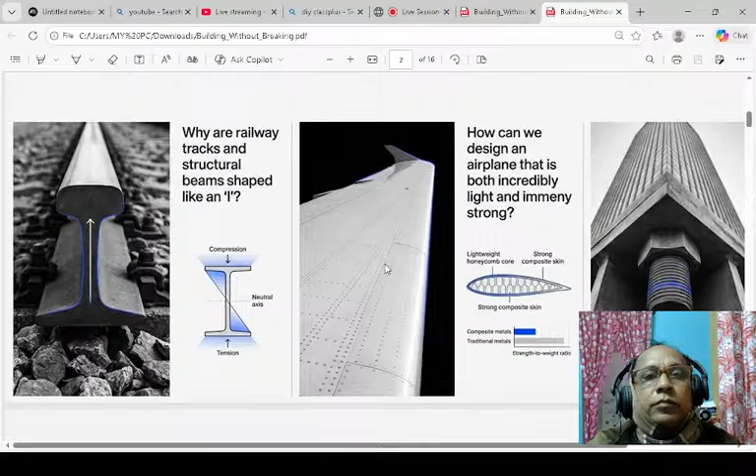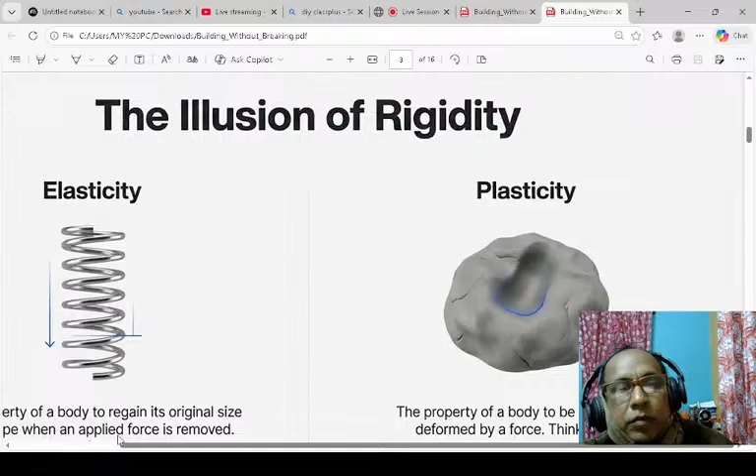The illusion of rigidity. In history, the illusion of rigidity - this is what we call it, elasticity, and this is plasticity.

The property of a body to regain its original size and shape when an applied force is removed - that property is known as elasticity. And what is plasticity? The property of a body to be permanently deformed by a force. For example, think of putty.

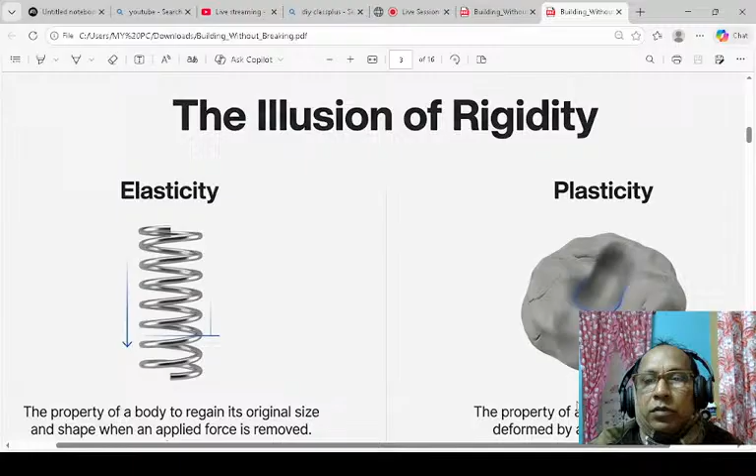The behavior is key to engineering design. The internal battle - understanding stress. When an external force deforms a body, an internal restoring force develops. The stress is this restoring force per unit area.

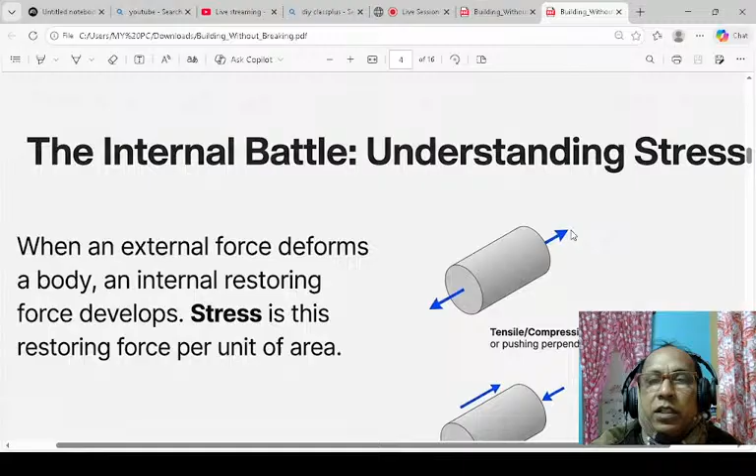Tensile and compressive stress: forces pulling or pushing perpendicular to the surface. You see here, these forces are perpendicular to the surface. Stress, that is sigma, can be written as force by area. The SI unit is the Pascal.

This is tensile and compressive stress - forces pulling or pushing perpendicular to the surface. In this case, shearing stress is forces acting parallel to the surface. And hydraulic stress is uniform pressure on all sides, like a sphere in a fluid.

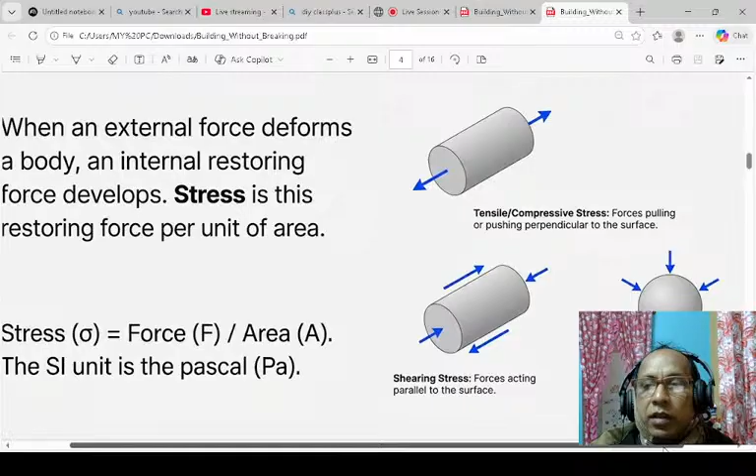The physical response - measuring strain. Strain is the measure of deformation, the fractional change in a body's dimension. It has no units.

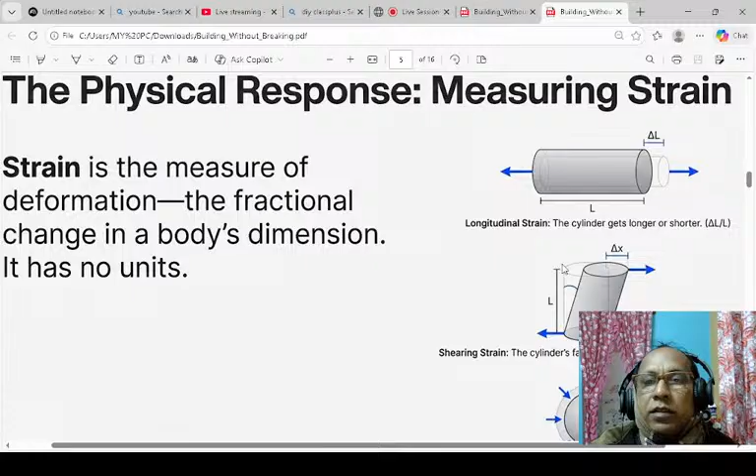Longitudinal strain - the cylinder gets longer or shorter, del L by L. Del L means change in length and L means original length. Strain is a measure of deformation, the fractional change in a body's dimension, and it has no units.

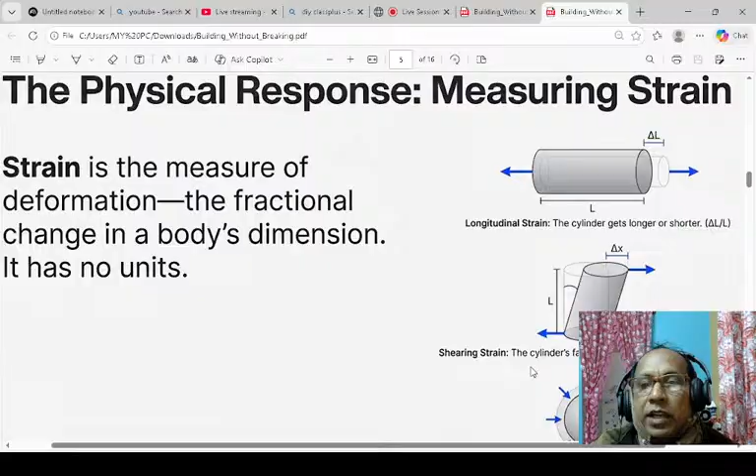Shearing strain - the cylinder faces displace relative to each other, that is del x by L. And volume strain is the sphere's volume decreases - change in V by original V, or del V by V. That is the volume strain.

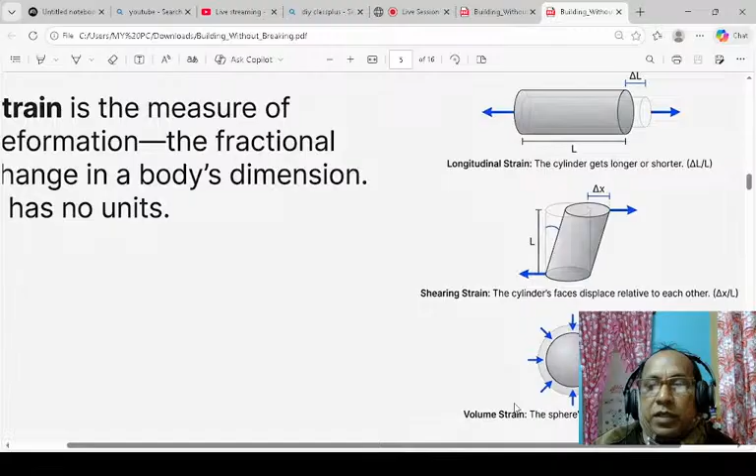So we have longitudinal strain, shearing strain, and volume strain. In longitudinal strain, we get del L by L, change in length by original length. In shearing strain, the cylinder's faces displace relative to each other, del x by L. And in volume strain, the sphere's volume decreases, del V by V.

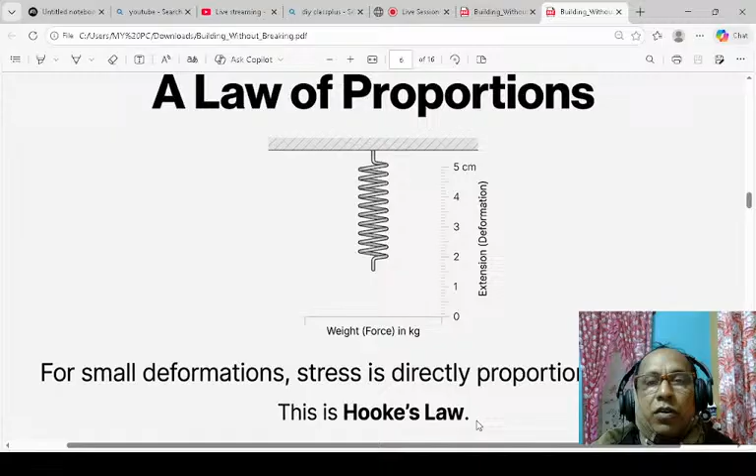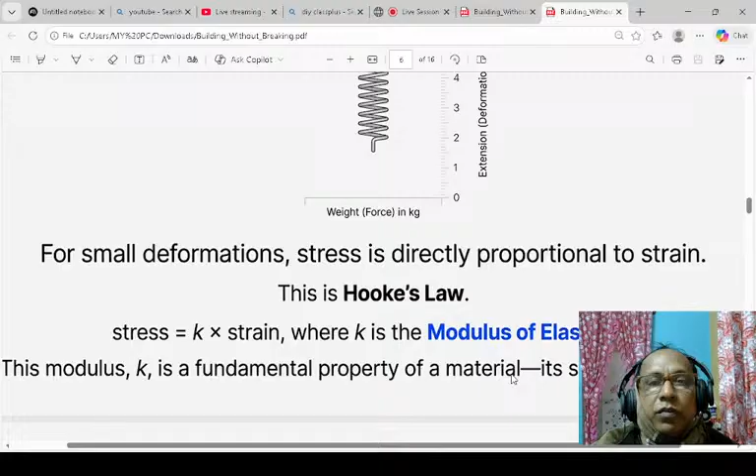The next one is the law of proportions. For small deformations, stress is directly proportional to strain - this is Hooke's law. You see the weight, 1, 2, 3, 4, 5 centimeter extension or deformation, weight force in kg - this is known as Hooke's law. For small deformation, stress is directly proportional to strain, that is, stress equals K into strain, where K is the modulus of elasticity.

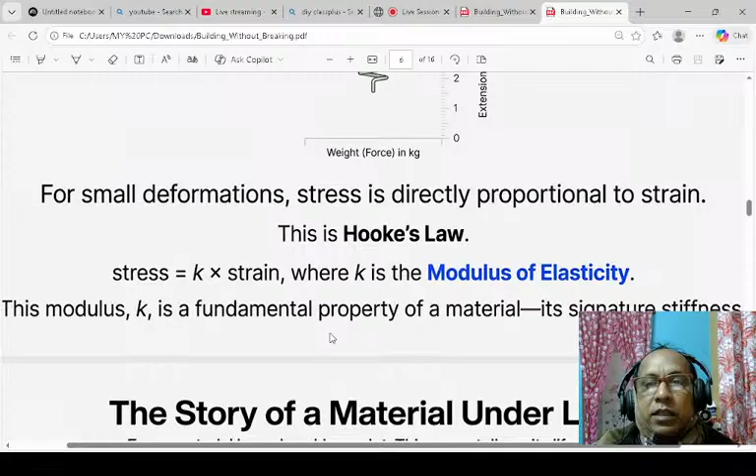This modulus K is a fundamental property of a material, its signature stiffness. The story of a material under load - every material has a breaking point, and this curve tells us its life story.

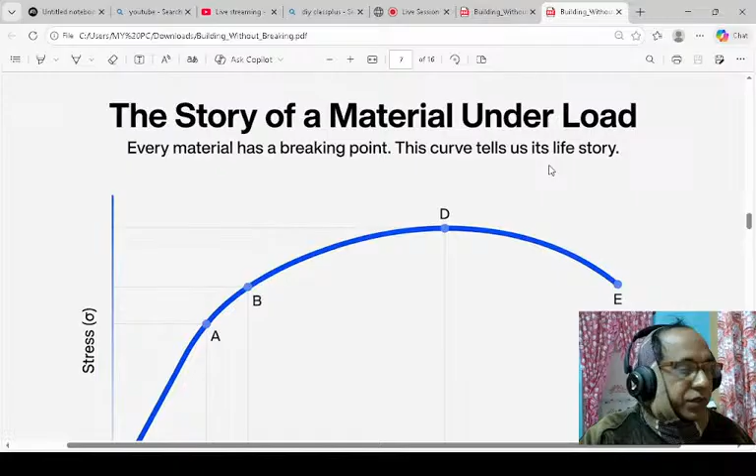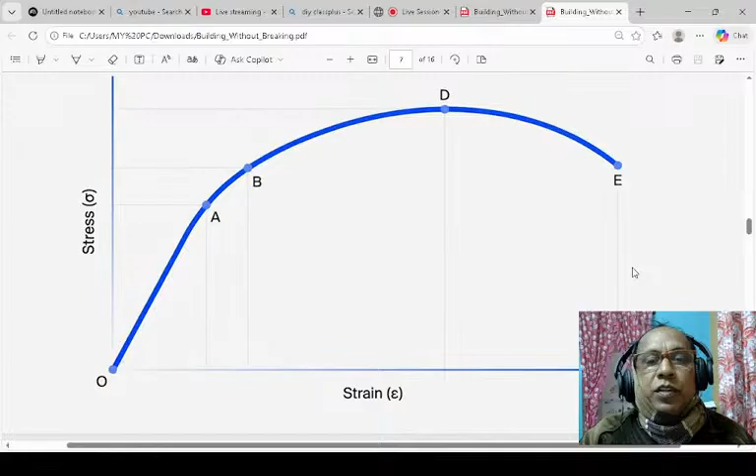This is stress, this is strain, and this is the curve A, B, C, A, B, D, and E. This is the curve with stress and strain. You see, and there is a breaking point also. You can find this in chapter 1.

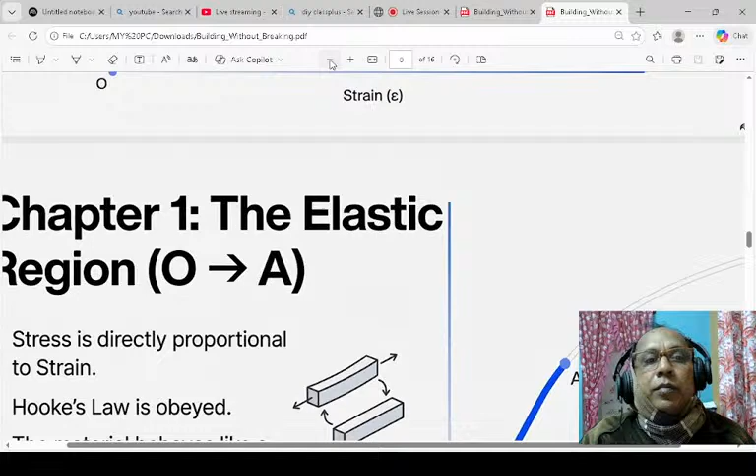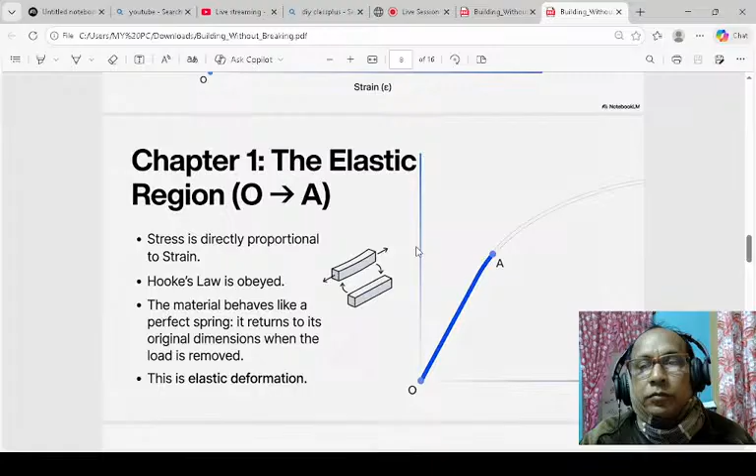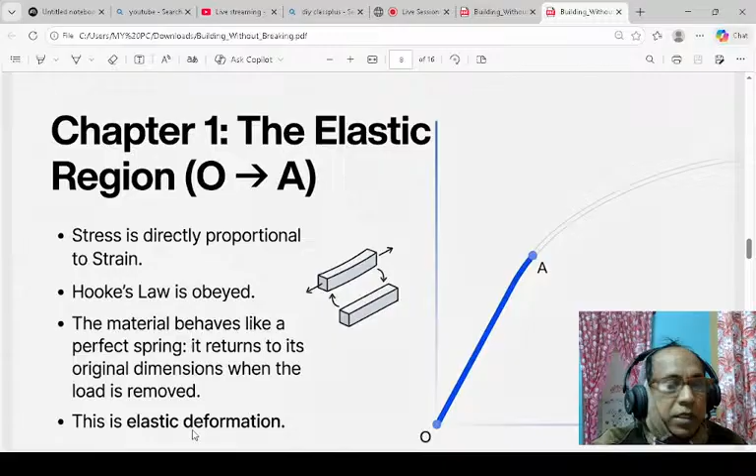The elastic region, O to A - stress is directly proportional to strain. Hooke's law is obeyed from O to A. The material behaves like a perfect spring, returning to its original dimension when the load is removed. This is elastic deformation.

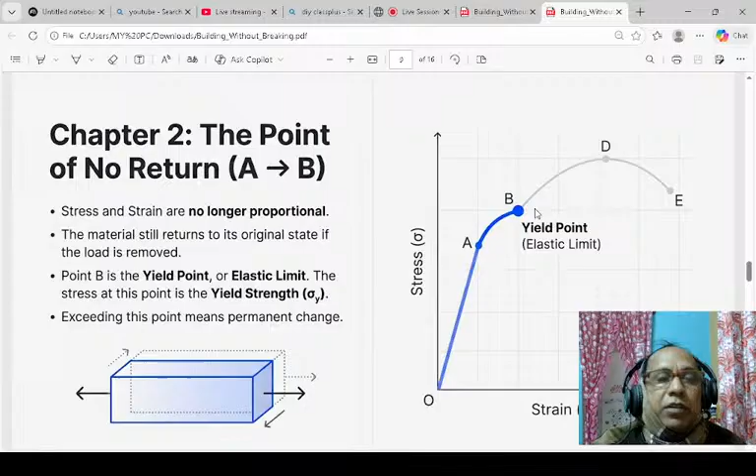Chapter 3: permanent set and failure, plastic deformation. Beyond the yield point, the material is permanently deformed. This is called the permanent set.

Ultimate tensile strength, point D, is the maximum stress the material can withstand. Fracture, point E, is where the material breaks.

Ductile and brittle: if D and E are far apart, the material is ductile, like steel. If they are close together, it is brittle, like glass. Glass is brittle and steel is ductile.

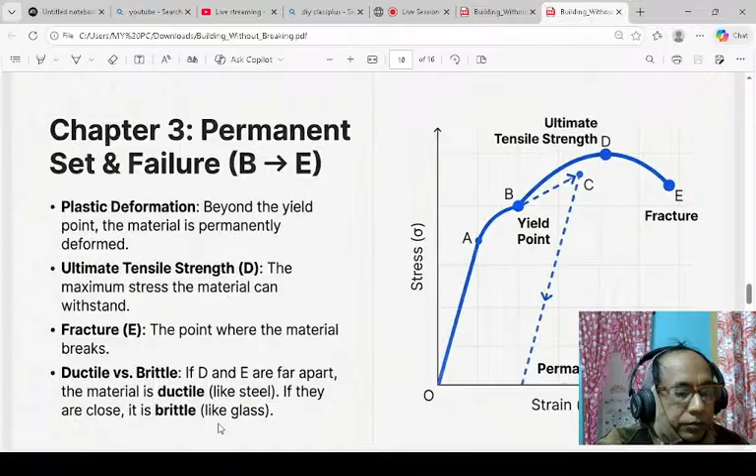A material's personality: the elastic moduli. The ratio of stress to strain in the elastic region gives a precise measure of a material's stiffness. There are three key types: Young's modulus, shear modulus, and bulk modulus.

Young's modulus is resistance to change in length: tensile stress by longitudinal strain. Shear modulus, or G, is resistance to change in shape: shearing stress by shearing strain. Bulk modulus is resistance to change in volume: hydraulic stress by volume strain.

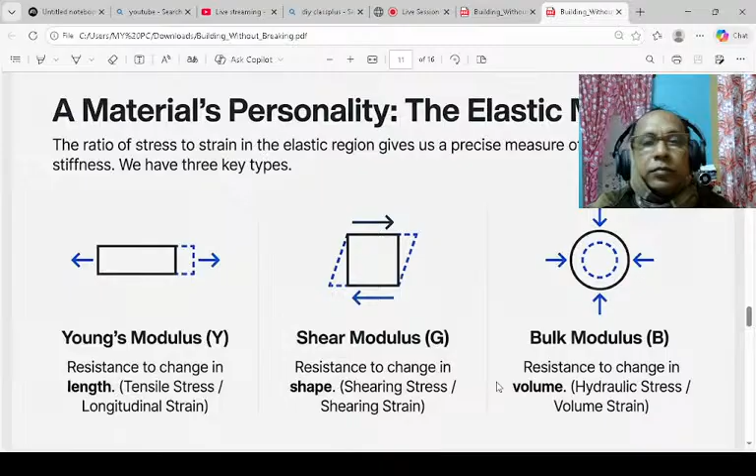Why is steel not rubber? To increase the length of a thin steel wire by 0.1%, a force of 2000 Newton is required. The force required to produce the same strain in aluminum is only 690 Newton. A large Young's modulus means a material is very stiff and requires immense force to produce a small deformation.

This is why steel is preferred for structural design. Here you see the Young's modulus values: this is the stiffness of steel, this is bone, this is wood - this shows the stiffness of steel, which we call Young's modulus.

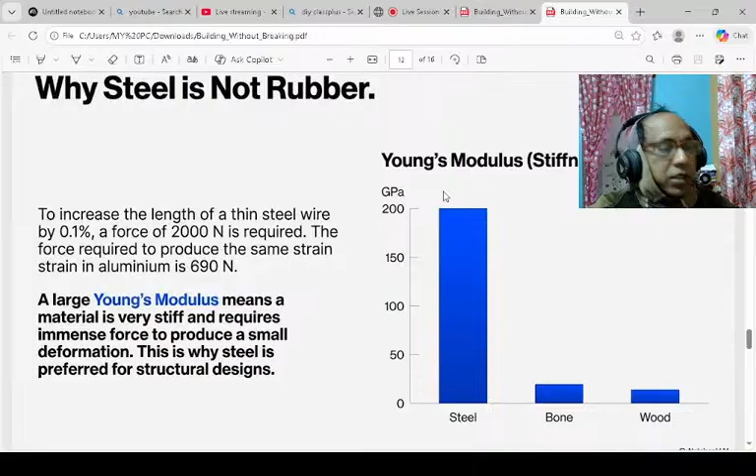How much can a 1 centimeter steel rope lift? A crane must lift 10 tons, 10,000 kg. How thick must its steel rope be to avoid permanent deformation? The key: the stress in the rope must not exceed the yield strength of steel.

From data tables, sigma y for mild steel is 300 × 10⁶ Newton per meter square. The calculation: force equals weight, 10,000 kg times 9.8, giving 98,000 Newton. Required area equals force divided by sigma y, giving 3.3 × 10⁻⁴ meters square. This corresponds to a radius of about 1 centimeter. A safety factor of 10 is usually added, recommending a 3 centimeter radius rope. This way you can find how much a 1 centimeter steel rope can lift using yield strength.

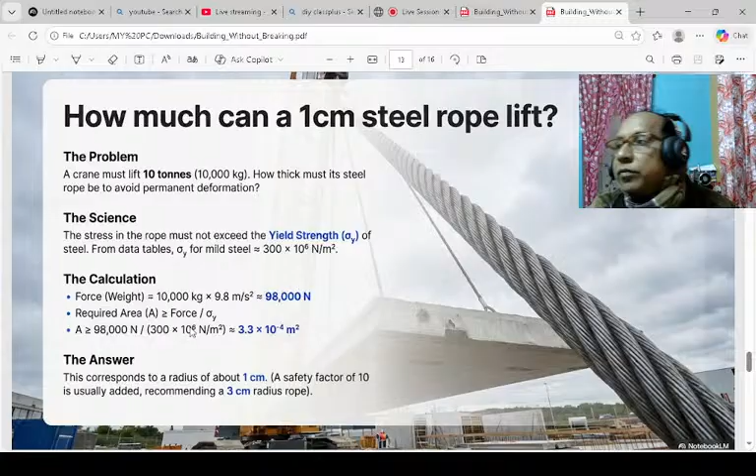Now we learn another thing: why the I in I-beam. This is the equation of bending.

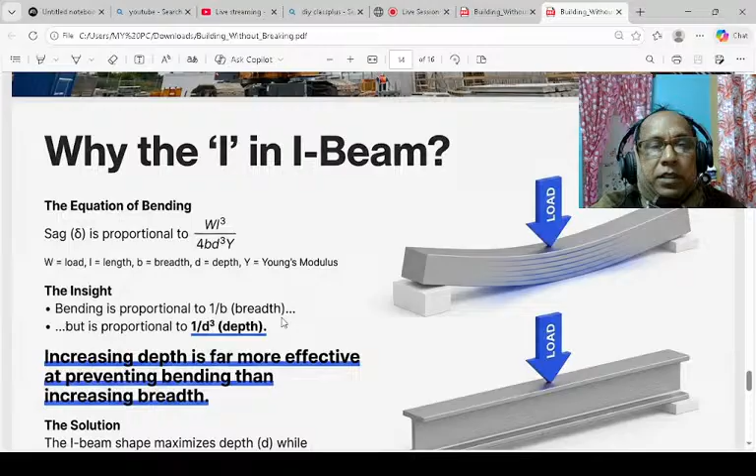The equation of bending: sag, delta, is proportional to W L cubed divided by 4 B D cubed Y. W is the load, L is the length, B is the breadth, D is the depth, and Y is Young's modulus. Bending is proportional to 1 by breadth, but proportional to 1 by D cubed, the depth. Increasing depth is far more effective at preventing bending than increasing breadth.

The solution is the I-beam shape. The I-beam shape maximizes depth while removing non-essential material from the middle, reducing weight and cost without sacrificing strength.

The limit of a mountain: what is the main thing in mechanical properties of matter? The question is, why can't mountains on earth grow infinitely tall? What is the reason for that?

The science: the base of a mountain is under immense pressure from the weight above it. This creates a shear stress within the rock. If this stress exceeds the rock's elastic limit, the rock will flow like a very slow liquid.

The calculation: stress at base equals h into rho into g - height into density into gravity. The elastic limit of typical rock is 30 × 10⁷ Newton per meter square. Solving for h gives h equal to 10 kilometers.

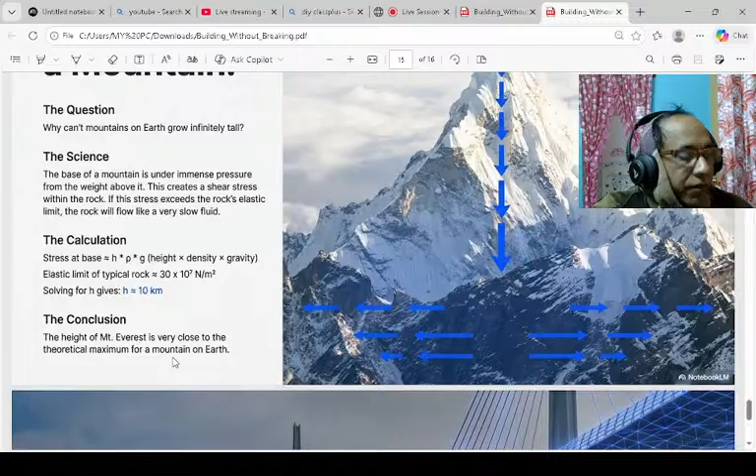The height of Mount Everest is very close to the theoretical maximum for a mountain on earth. From the tallest mountain to the strongest steel, our world is shaped by the invisible laws of stress and strain.